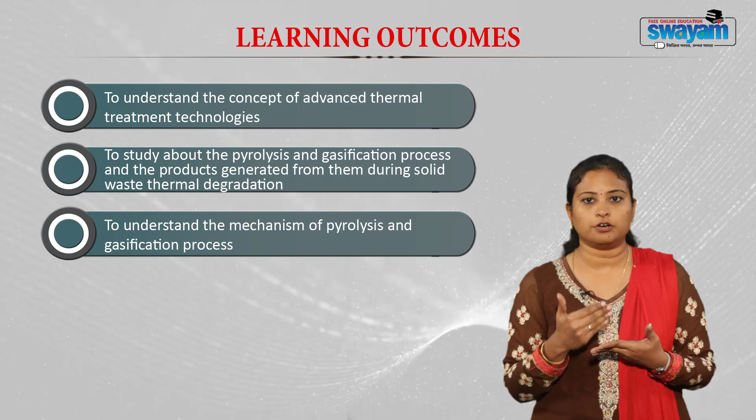The learning objectives include: first, understanding the concept of advanced thermal treatment technologies. Then we will study in detail about pyrolysis and gasification processes, look into the various products generated from them during solid waste thermal degradation, and understand the various mechanisms of pyrolysis and gasification.

We will also study the different types of pyrolysis and gasification processes available and the various reactors used to perform them. Finally, we will understand the different merits and demerits of the pyrolysis and gasification processes.

Advanced thermal treatment technologies are waste treatment technologies that use very high temperature to degrade or destruct the waste. They are specifically designed to recover energy in the form of heat or electricity, and other end products usable as chemical feedstock. The main purpose is to reduce the impact of residual waste on the environment. Pyrolysis and gasification are examples of these advanced thermal treatment technologies.

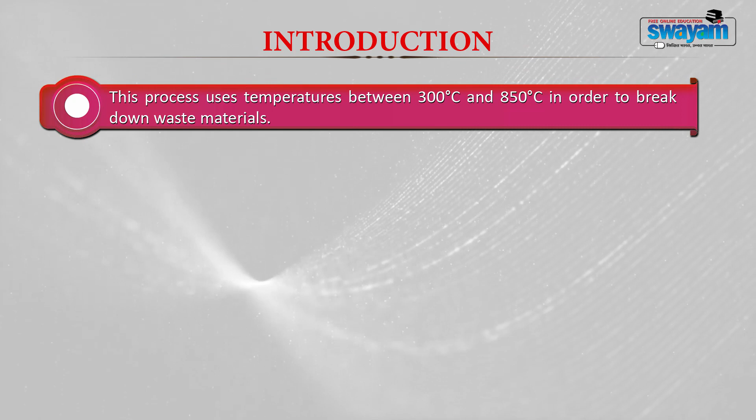Pyrolysis is a process where waste is thermally destructed in the absence of oxygen at a temperature of 300 to 850 degrees Celsius. Gasification is done in the limited supply of oxygen at a temperature of 900 to 1400 degrees Celsius. Pyrolysis results in the production of three compounds: solid, liquid and gases—solid char, liquid oil, and gases like carbon monoxide, hydrogen and carbon dioxide.

Likewise, the process of gasification results in the production of syngas, which is carbon monoxide and hydrogen, along with tar and other fertilizer value products.

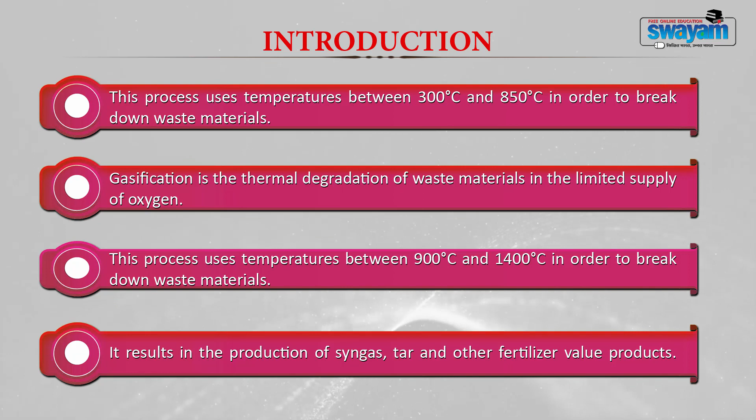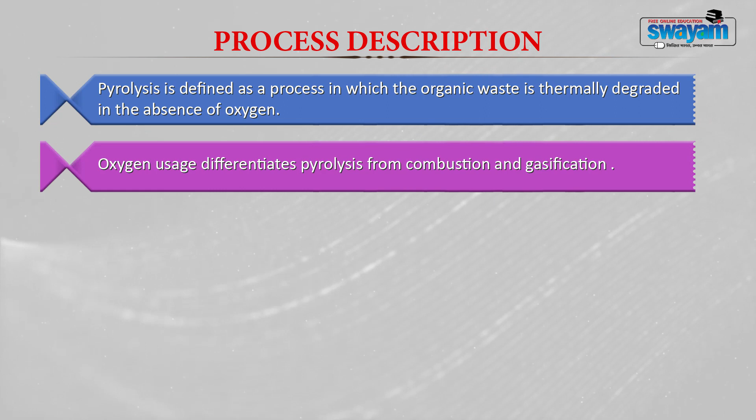Now let us discuss pyrolysis in detail. In pyrolysis, organic waste is thermally destructed in the absence of oxygen. Oxygen is the key factor that differentiates pyrolysis from other processes like combustion and gasification. Combustion is done in the presence of oxygen, gasification in limited supply of oxygen, and pyrolysis in the absence of oxygen.

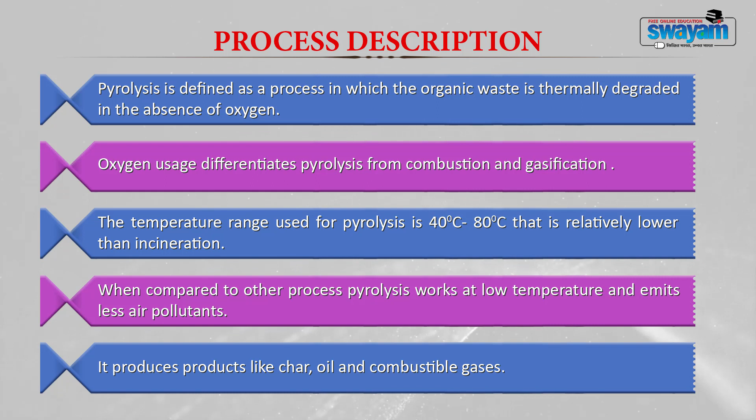The temperature range varies from 400 to 800 degrees Celsius, comparatively lower than incineration. Since pyrolysis is operated under low temperature, this results in emission of less air pollutants. It also produces products like char, a solid product, oil, a liquid product, and certain combustible gases.

Pyrolysis is a flexible process with the ability to produce solid, liquid and gaseous products, and the quantity of each depends upon the temperature and heating rate. It transforms low energy density waste into biofuels of high energy density and high value chemicals. The end products obtained at the end of the pyrolysis process are explored for fuel applications, as chemical feedstock, and for other energy extraction processes.

The mechanism involved is very simple. Complex materials like paper, plastic, metal, glass, cardboard, leaf litter, and other biodegradable and hazardous chemicals are heated at very high temperature. At this temperature, complex polymeric organic molecules like cellulose, hemicellulose and lignin break down and get converted into short chain molecules. Further exposure to heat breaks these short chain molecules into oils and other gases.

Now, let us discuss about what are the different products that are produced during pyrolysis, at what conditions they are produced, where they are used, and what are their applications and significance.

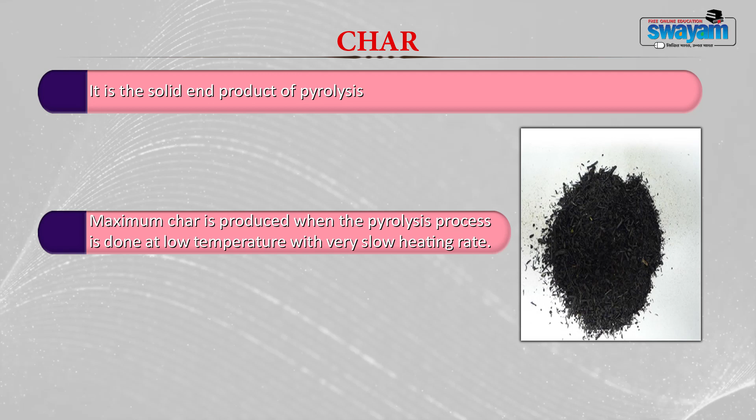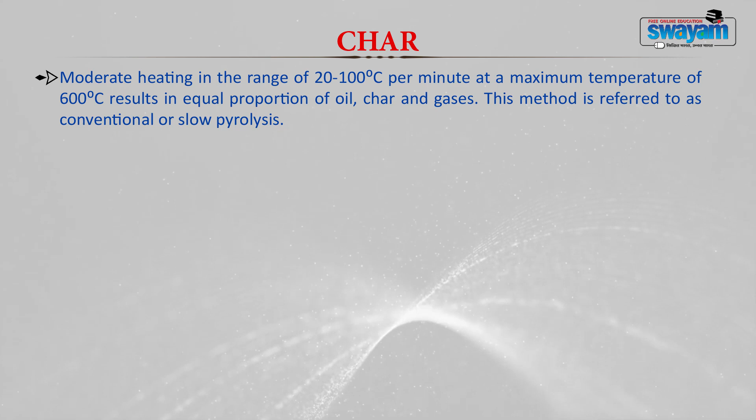Char is a solid end product of pyrolysis. Char production can be maximized at low temperature and a slow heating rate, and it depends upon the pyrolysis process condition. Moderate heating in the range of 20 to 100 degrees Celsius per minute at a maximum temperature of 600 degrees Celsius results in an equal proportion of oil, char and gas. This method is generally referred to as conventional or slow pyrolysis.

The solid char produced from slow pyrolysis can be used as charcoal. The char formation is generally reduced in the flash pyrolysis process.

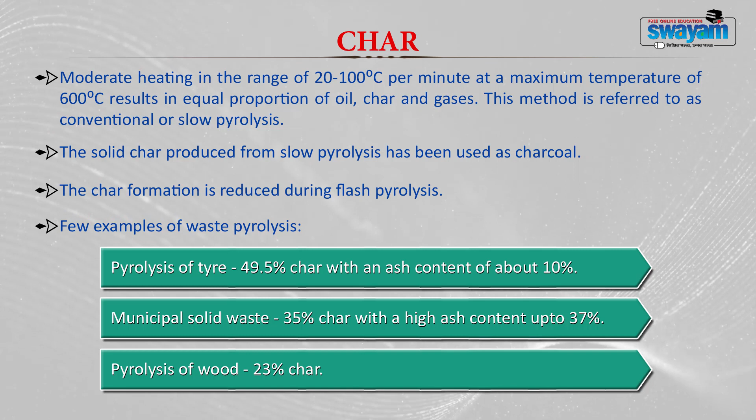Examples of char production during pyrolysis: the pyrolysis of tire results in 49.5% char production with an ash content of 10%. Municipal solid waste produces 35% char with a high ash content of up to 37%. Likewise, the pyrolysis of wood results in 23% char production.

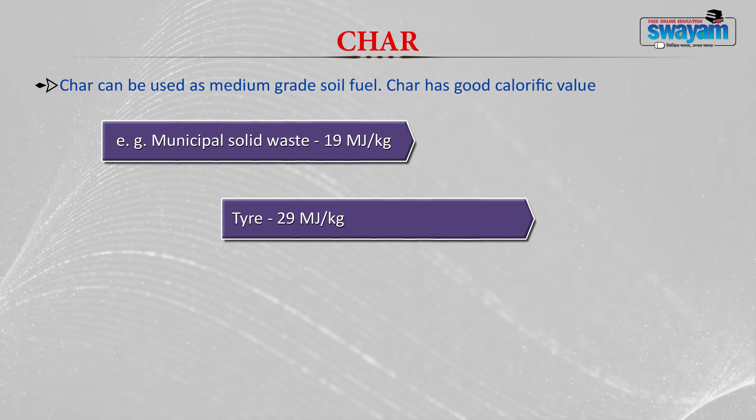Char can be used as a medium grade solid fuel, as it has a good calorific value. For example, char generated from municipal solid waste contains around 19 megajoules per kg calorific value. Tire char contains a calorific value of 29 megajoules per kg, and wood contains 33 megajoules per kg. Generally, the value of char in fuel production is minimized due to the ash content present in the product at the end of pyrolysis.

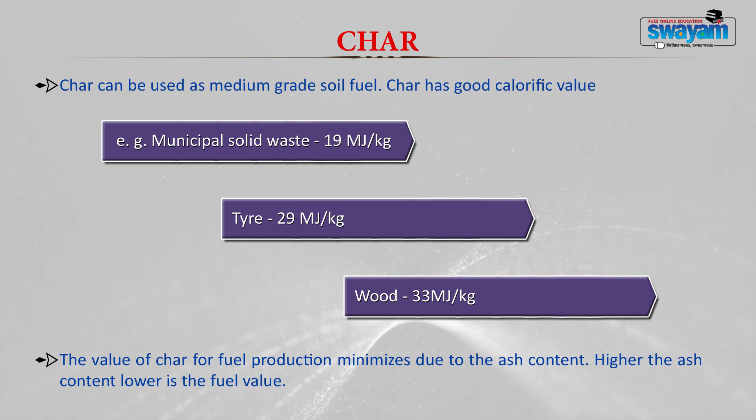Higher the ash content, lower will be the fuel value. So generally what you have to do is de-ashing before using it for fuel purposes.

The next product produced during the pyrolysis process is oil. The oil generated from the pyrolysis process contains a high energy density per unit weight. It can be used as a fuel with certain modification. Generally what they do is combine or mix it with petroleum refinery stock and upgrade the quality using certain catalysts. The calorific value of oil generated from municipal solid waste ranges from 25 to 40 megajoules per kg.

The composition of oil is very complex and contains a wide variety of chemicals ranging from organic acids, phenols, alcohols, aldehydes, ketones, furans, etc.

Maximum amount of oil production can be obtained by flash pyrolysis. If you talk about char, slow pyrolysis results in maximum char production and flash pyrolysis results in reduced char production. So here, maximum oil production can be obtained by the flash pyrolysis process.

Now, depending upon the feedstock used in the pyrolysis process, the oil produced can be categorized as true oil, oil aqueous phase, separated oil, and aqueous phase.

Now let us see the applications of this oil. The oil derived from the pyrolysis of municipal solid waste cannot be used directly as a fuel because of the presence of solid char particles, viscosity and acidity. So you have to refine it before use.

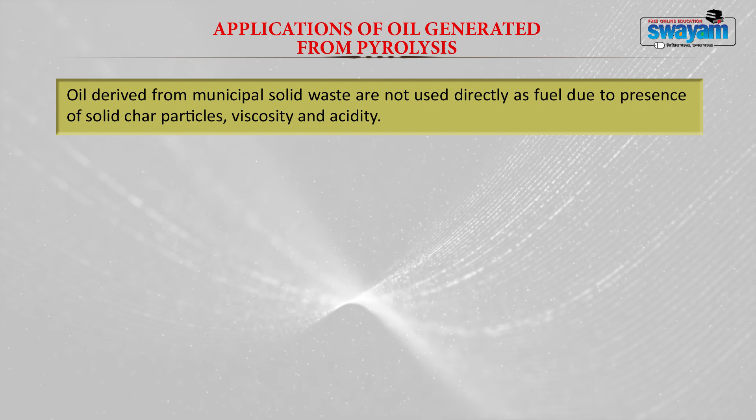So the pyrolysis oil is generally used as a chemical feedstock, meaning it acts like a raw material for the production of other products. Compounds like methylphenol, methoxyphenol, furfural, and methoxypropenyl phenol are produced during wood pyrolysis. They can be used in the food, paint and pharmaceutical industries.

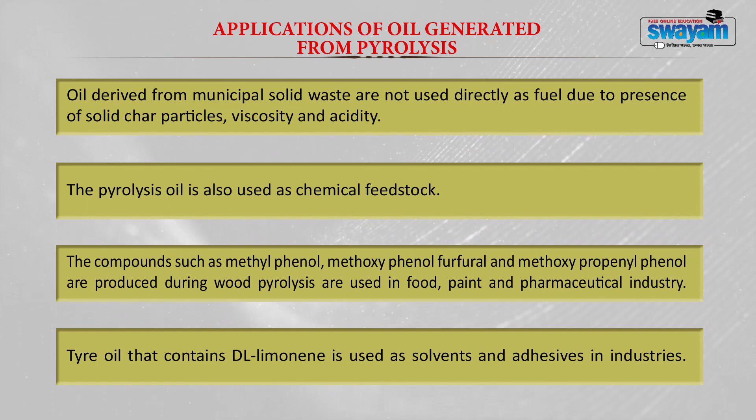Likewise, the oil generated during tire pyrolysis contains DL-limonene. It can be used as a solvent and adhesive in certain industries. They also replace chlorofluorocarbons and can be used as a cleaning agent for electronic circuit boards.

Benzene, toluene, xylene and styrene that are produced can be used in the chemical and pharmaceutical industry. Likewise, the waxy oil generated during mixed pyrolysis can be used in catalytic cracking to produce gasoline.

The third product produced during the pyrolysis process is gases. The gas generated during pyrolysis is composed of hydrogen, carbon monoxide, carbon dioxide, methane, and certain hydrocarbon gases. High levels of carbon dioxide and carbon monoxide are due to the presence of cellulose, hemicellulose and lignin in the waste material.

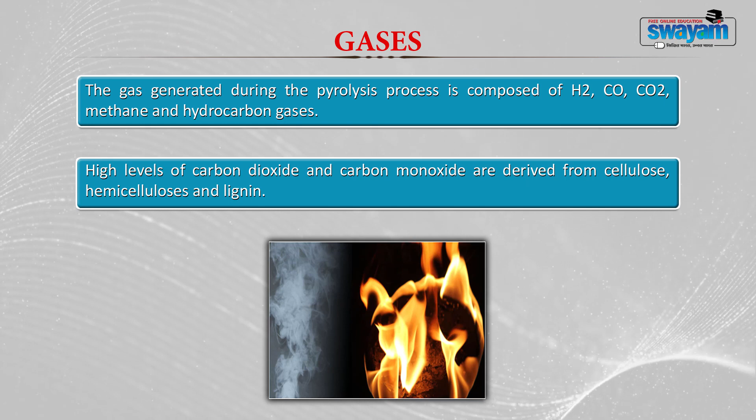High levels of hydrogen, methane and other hydrocarbon gases are formed during the pyrolysis of tire and mixed plastics. These gases generally have medium to high calorific value.

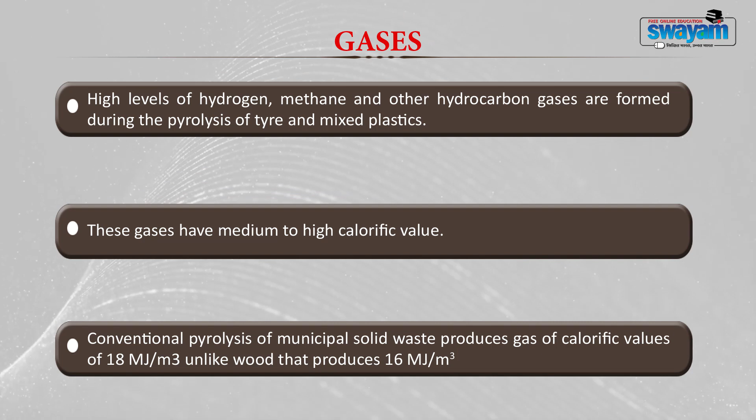Conventional pyrolysis of municipal solid waste produces gas with a calorific value of 18 megajoules per cubic meter, unlike wood, which produces 16 megajoules per cubic meter of gas.

High heating rate and temperature break down the pyrolysis oil into gas. So a maximum calorific value of 40 megajoules per cubic meter is observed in gas produced during tire pyrolysis.

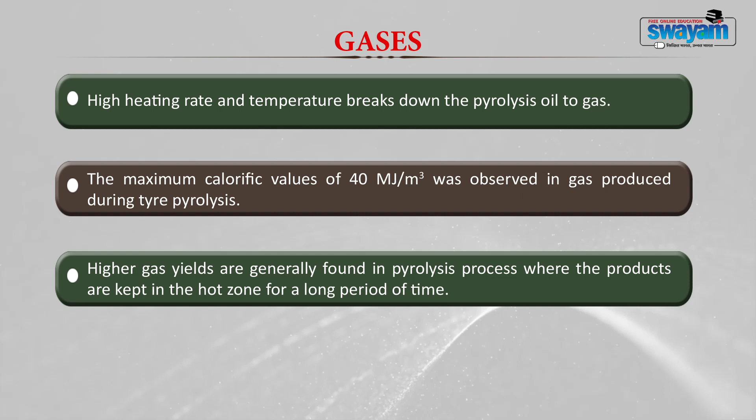Higher gas yields are generally found in pyrolysis processes where the products are kept or exposed to a hot zone for a long period of time. The gas yield is higher even at temperatures above 750 degrees Celsius.

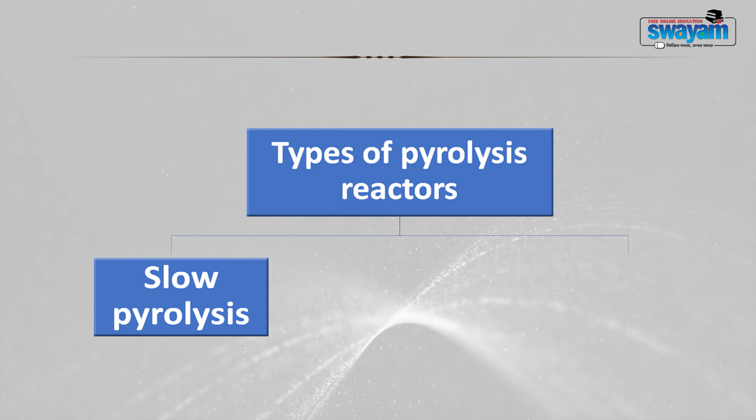Now let us discuss the various types of pyrolysis process. As I told you earlier, you have slow pyrolysis, flash pyrolysis, and vacuum pyrolysis. The first one is slow pyrolysis.

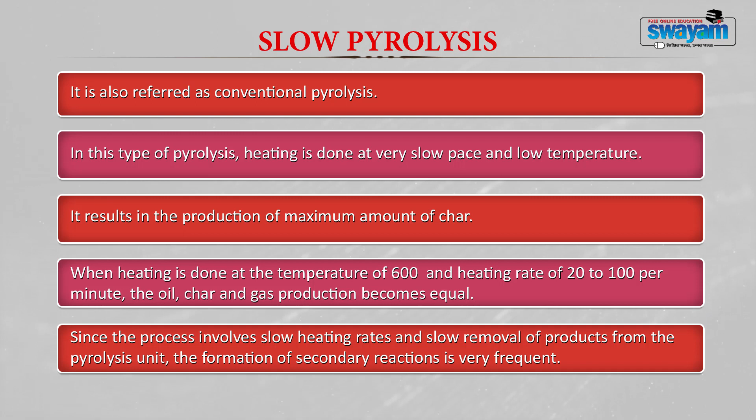Slow pyrolysis is also referred to as conventional pyrolysis process. In this type, heating is done at a very slow pace and low temperature, and it results in the production of maximum amount of char. When heating is done at a temperature of 600 degrees Celsius and a heating rate of 20 to 100 degrees Celsius per minute, the oil, char and gas production becomes equal. This I have already told you earlier. So under a slow pyrolysis process, you can achieve equal amounts of oil, char and gas. Since it involves a very slow heating rate and slow removal of products from the pyrolysis unit, the formation of secondary reactions is more frequent.

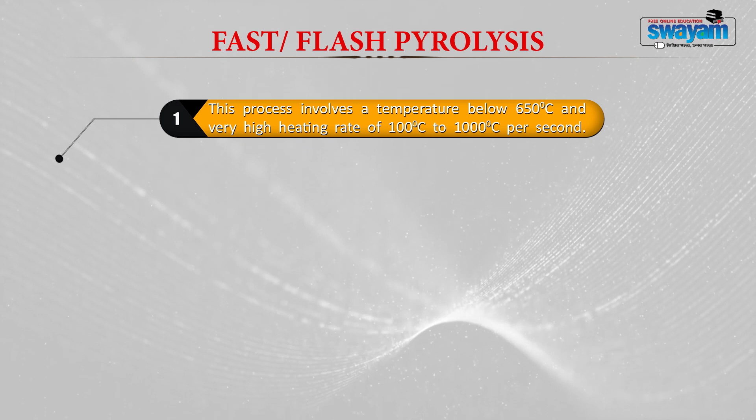The next type of pyrolysis process is fast or flash pyrolysis. Here, it involves a temperature below 650 degrees Celsius, but a very high heating rate of about 100 to 1000 degrees Celsius per second. The process results in a maximum liquid yield of 70% with a minimum amount of char and gas. Gas production is minimized due to rapid quenching of the liquid generated during the process. Also, the high reaction rate minimizes char formation. Wood and tire are examples of waste that can be pyrolyzed through the flash pyrolysis process.

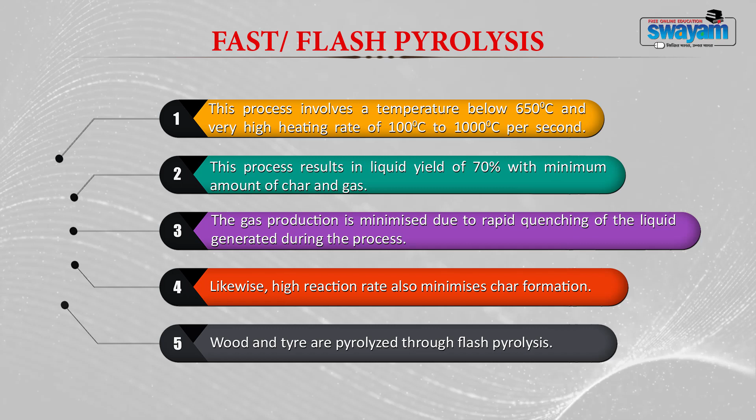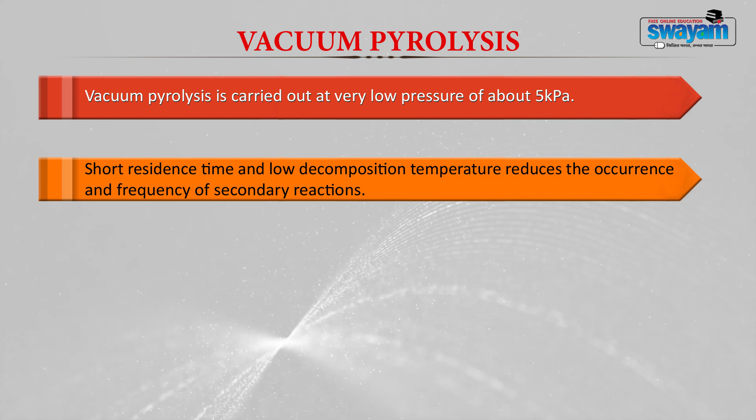The next type is vacuum pyrolysis. Vacuum pyrolysis is generally conducted at a low pressure of about 5 kilopascals. Short residence time and low decomposition temperature generally avoid or reduce the frequency of secondary reaction formation. Vacuum pyrolysis can be done for different types of waste like household waste, wood, plastic, tire, circuit boards and so on. This type of pyrolysis, however, is not common among the other types.

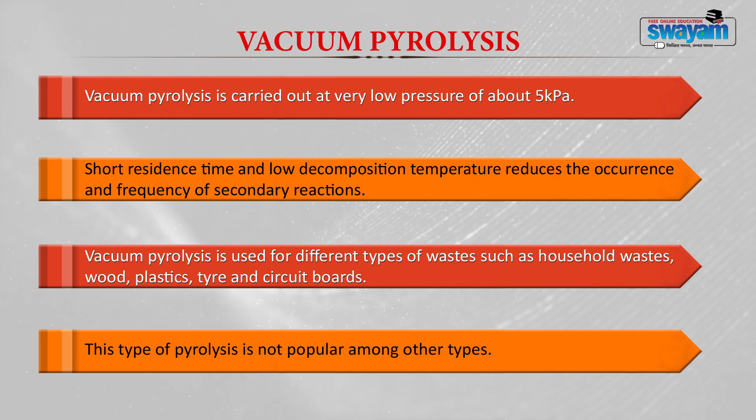Now let us discuss the different types of pyrolysis reactors. The first type is a fixed bed reactor, one of the simplest reactors. The design is very simple and you can construct it very easily. The reactor is generally made up of stainless steel, heated externally through an electric furnace, and inside you flush in nitrogen or argon gas to maintain inert conditions, because pyrolysis works under absence of oxygen. The waste is placed at the bottom and then subjected to heat.

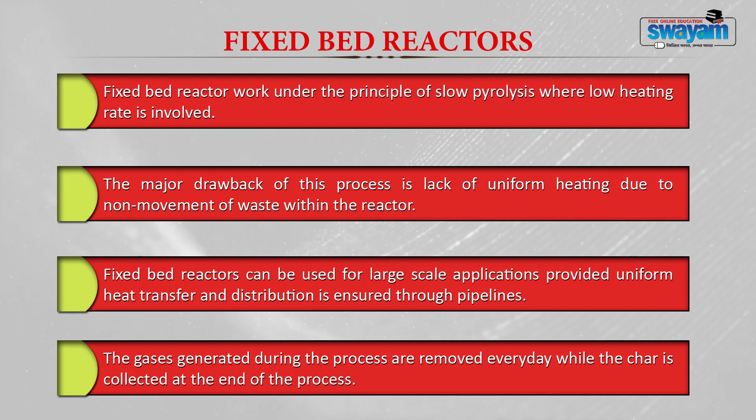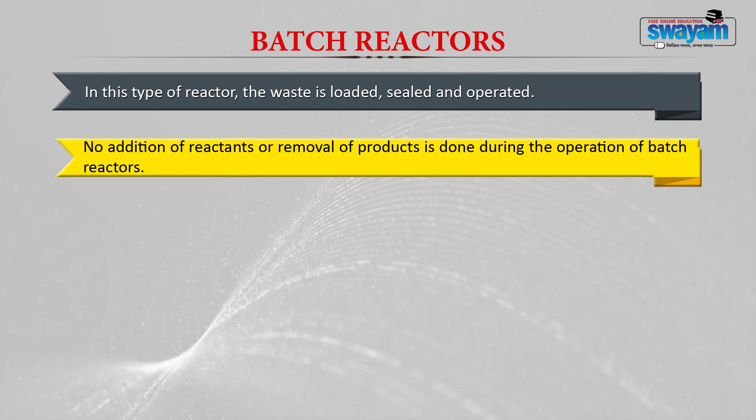The second type of reactor is the batch reactor. In this type, waste is loaded into the unit, sealed and operated. You neither add any reactant nor remove any product during operation of batch reactors. Here, high conversion rate is observed because the reactor is closed and sealed. However, in semi-batch reactors, addition of reactants and removal of products is generally allowed. The end pyrolysis product is not uniform for every batch. For example, if you operate the unit in the first batch, you receive certain products, but the quantity or composition of products will not be the same for the next batch operated in the batch reactor. That becomes a major disadvantage.

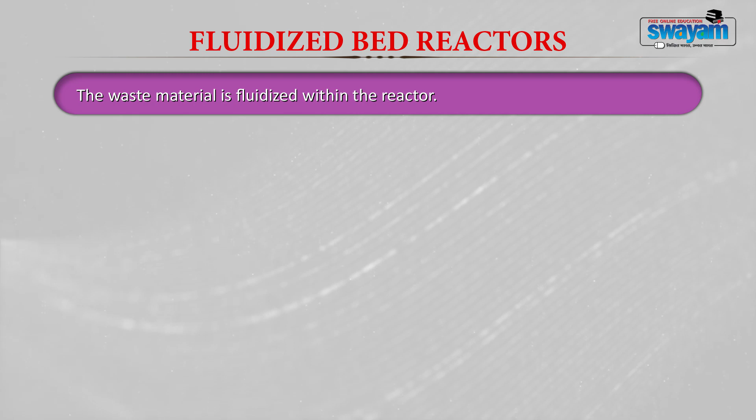The third type of reactor is the fluidized bed reactor. Here, the waste material is fluidized within the reactor, meaning it is just bubbled. The waste material keeps moving up and down, bubbling inside the reactor. Fluidization generally results in good mixing and proper distribution of heat within the waste mixture. The characteristic features of the fluidized bed reactor are high heating rate, it retains heat for a long period of time, and it distributes heat uniformly throughout the unit.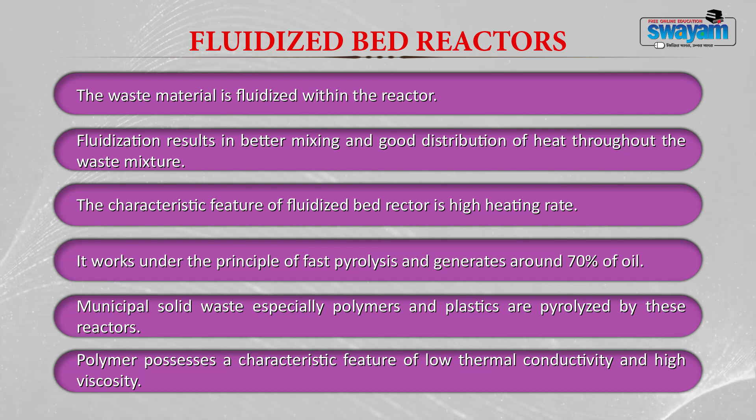It works under the principle of fast pyrolysis, resulting in the generation of maximum amount of oil, around 70%. Municipal solid waste, especially polymers and plastics, are pyrolyzed in fluidized bed reactors. Polymers generally possess low thermal conductivity and high viscosity as their characteristic, so the fluidized bed reactor will be optimum for those. High heating efficiency and high heat distribution in fluidized bed reactors generally facilitate the cracking of these polymers.

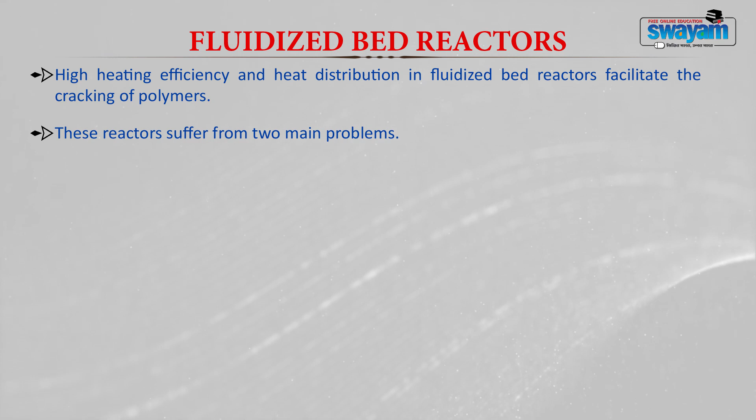These reactors generally suffer from two main problems. One, the char separation from the reactor is very difficult, and better fluidization is achieved only if the particle size is smaller. So the waste requires certain pre-treatment before being subjected to a fluidized bed reactor.

What you have to do is, after collection, the material should be sorted, dried, crushed or shredded into small pieces and then loaded into the reactor for the pyrolysis process. Plastics and paper can be shredded or cut into a size of 5 mm, and biomass can be reduced to a size of 1 centimeter.

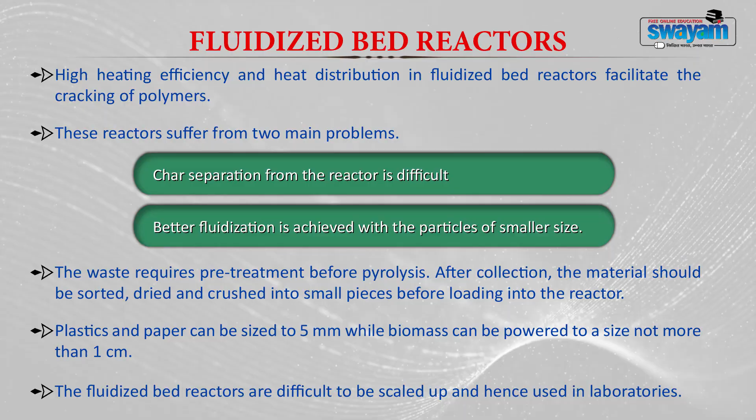Now, the fluidized bed reactors are very difficult to scale up, and hence they have limited application only in the laboratories. Now let us look into the advantages of the pyrolysis process.

Pyrolysis process is used for degrading biodegradable waste and plastics using high temperature. Here you can recover energy in the form of heat or electricity. When compared to mass burning, energy and other value added products are recovered by advanced thermal treatment processes like pyrolysis.

The high temperature involved in pyrolysis generally will kill all the pathogens and harmful organisms present in the solid waste. Also, it will reduce the water content of your final product.

The gas that is produced during the thermal degradation process can be used as a fuel. If you use them as a fuel, it will minimize the load on the use of external fuel, if the producer fuel is used for pyrolysis.

Then the biochar, the char that is produced during the pyrolysis process, can be used as a soil amendment or as activated carbon. Biochar is reported to sequester carbon and increase the fertility of soil. This again becomes an added advantage of the pyrolysis process.

The bio oil that is produced can be combusted either directly in boilers and engines. Also, this process degrades even complex pollutants into simpler ones.

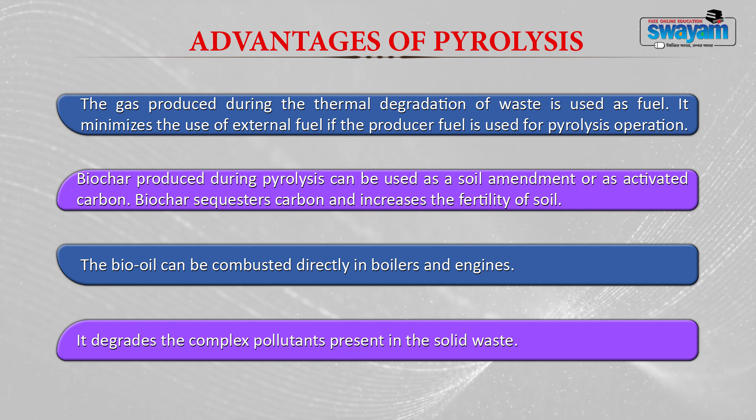Then it favors recycling of mixed plastics and soiled plastics which cannot be taken for the recycling process. This you can achieve in the pyrolysis process. Which means only plastics which have certain strength or thickness can be recycled. So other plastics like poly bags or soiled plastics used in agricultural mulch, silage or greenhouse films can be recovered or destroyed in the pyrolysis unit.

Now, the pyrolysis unit again minimizes the volume of waste, and the amount of residual waste sent to the landfill is very less. The pyrolysis plants are very flexible because they are modular in nature, and you can fix them at any point and perform the process.

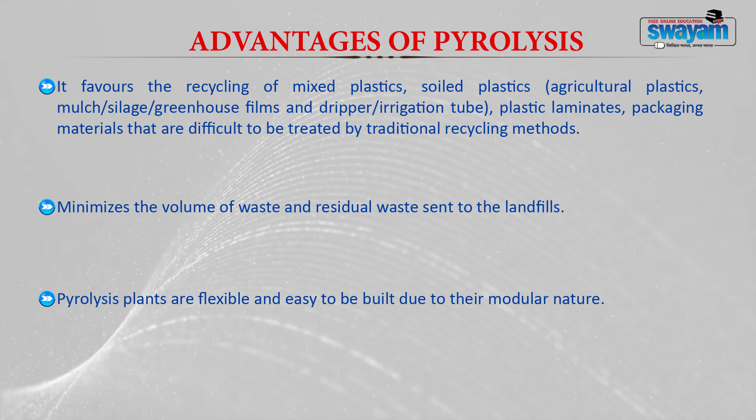Even you can fix it at the source of generation, or in the transfer station, or even at the disposal site. The number of pyrolysis units can also be added or reduced according to the requirement of a society or community. Also, these units are very easy to build. Moreover, since pyrolysis units work under very low temperature, the air pollution emission levels are very less, unlike your incineration process.

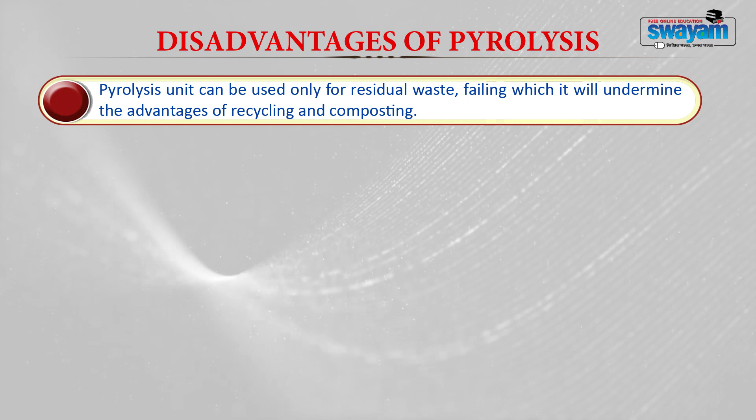Now let us discuss the disadvantages of the pyrolysis process. Pyrolysis can be used only for residual waste, failing which it will undermine the advantages of recycling and composting. Second, feedstock of pyrolysis generally needs pre-treatment or pre-processing before being subjected to the pyrolysis process.

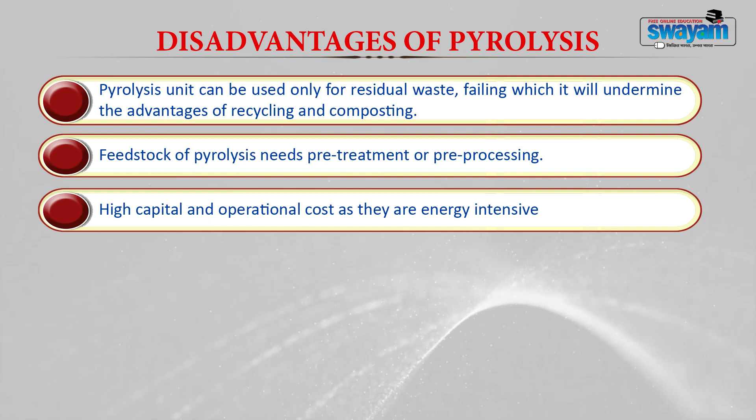High capital and operational cost. Pyrolysis process involves high capital and operation cost because it is very energy intensive, as it involves very high temperature. It also requires skilled operators for operating the unit. Also, though it emits less air pollution, control devices need to be installed in the pyrolysis unit. The ash generated during the thermal degradation may contain certain heavy metals and would require safe disposal.

With this, let us look into the process description of the gasification process. Gasification is a process by which solid or liquid waste material is converted, by the action of heat, into a gaseous material, ash and tar, in a limited supply of oxygen. It is a unique process in which the carbon present in the municipal solid waste is converted into energy without burning it.

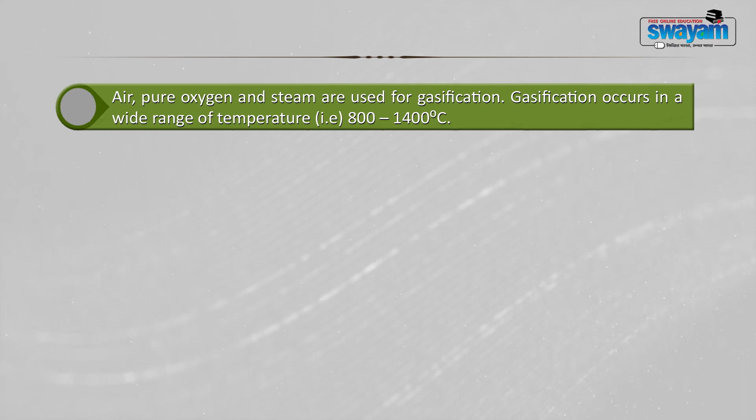The gases generated during the process are carbon monoxide and hydrogen, generally termed as syngas. Other gases like carbon dioxide and methane are also produced. Gasification is done at a temperature of 800 to 1400 degrees Celsius, and air, pure oxygen, and steam can be used as agents for performing the gasification process.

According to the supplementing agent used for burning the waste, the calorific value of the gas also keeps changing, from a low calorific value of 4 megajoules per meter cube to 20 megajoules per meter cube. That is, when air is used, the calorific value is low, and when steam is used, the calorific value is as high as 20 megajoules per meter cube.

The calorific value of the gases produced during the gasification process is comparatively low when compared with natural gas, which has a calorific value of 37 megajoules per meter cube.

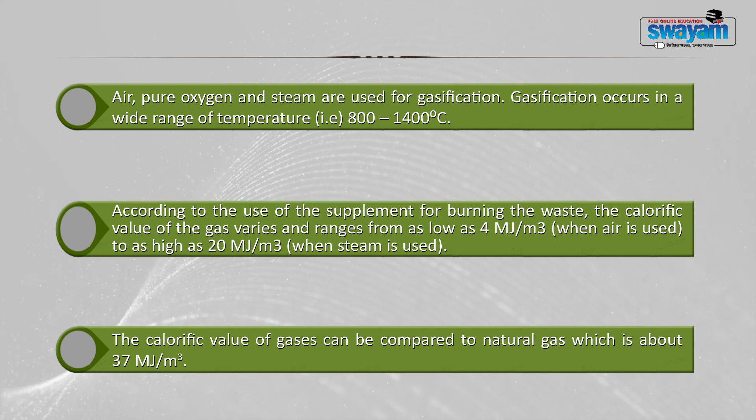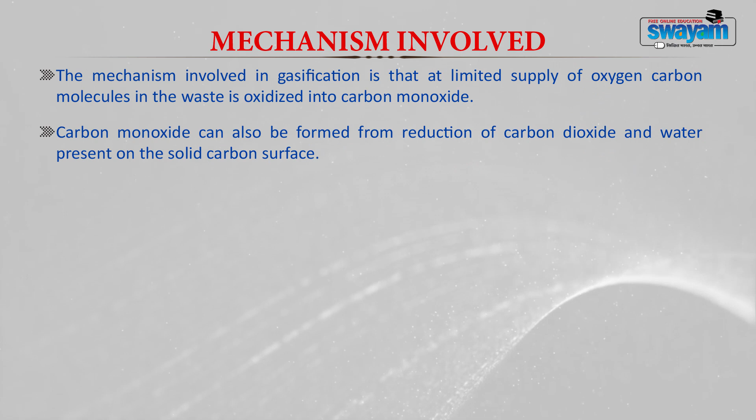Now let us discuss the mechanism involved in the gasification process. During limited supply of oxygen, carbon molecules present in the waste are oxidized into carbon monoxide. Carbon monoxide can also be formed by the reduction of carbon dioxide and water present on the solid carbon surface.

Gasification is always preceded by pyrolysis, and hence char-like organic material can be used as feed for the gasification process. What I mean is, pyrolysis can be done first, and the char produced in the pyrolysis process can be further subjected to gasification to result in the production of syngas.

Gases generally interact with the solid char interface to extract carbon from the surface into gases such as methane, carbon monoxide and carbon dioxide. Gaseous water can interact with the char surface to be reduced into gaseous hydrogen.

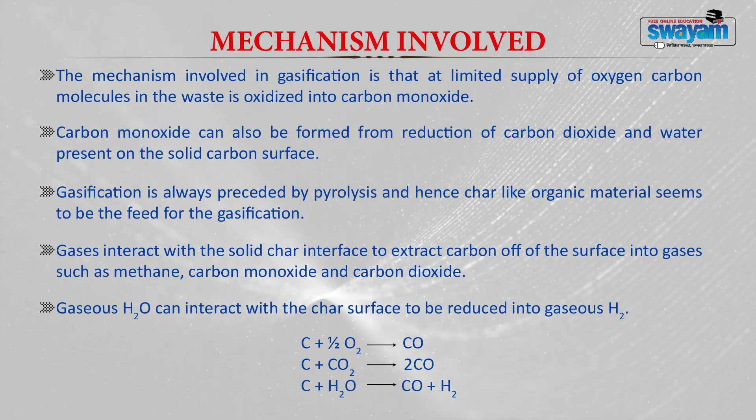Carbon combines with half a molecule of oxygen to provide carbon monoxide, and carbon monoxide can also be formed from carbon dioxide. Carbon combines with carbon dioxide to form two molecules of carbon monoxide. Then the water vapor can combine with carbon to produce carbon monoxide and H2 gas.

When put together, these gases are called syngas. Now let us discuss the different types of gasification process. Depending upon the agent used for performing gasification, like air, oxygen, steam or hydrogen, they are classified into different types: air gasification, oxygen gasification, steam gasification, gasification with hydrogen, thermal depolymerization, and plasma gasification.

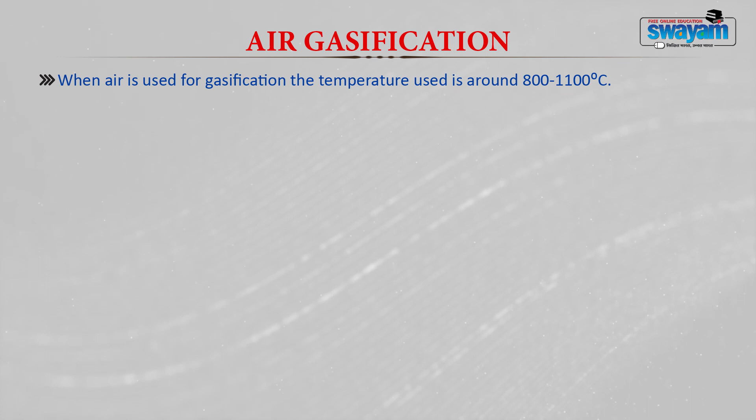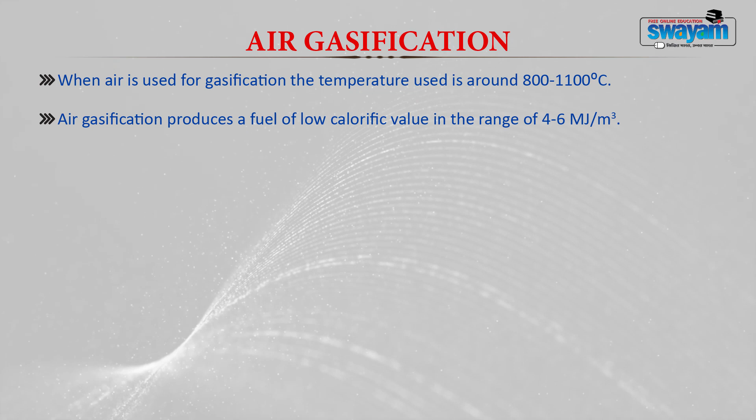Air gasification is a process where air is used for gasifying the waste material, and the temperature requirement is 800 to 1100 degrees Celsius. This generally produces a gas or fuel of low calorific value, in the range of 4 to 6 megajoules per meter cube. The moisture present in the air produces hydrogen. In addition to other gases, nitrogen also occurs as a major component, along with carbon monoxide, carbon dioxide and methane. Nitrogen generally reduces the calorific value of the gas.

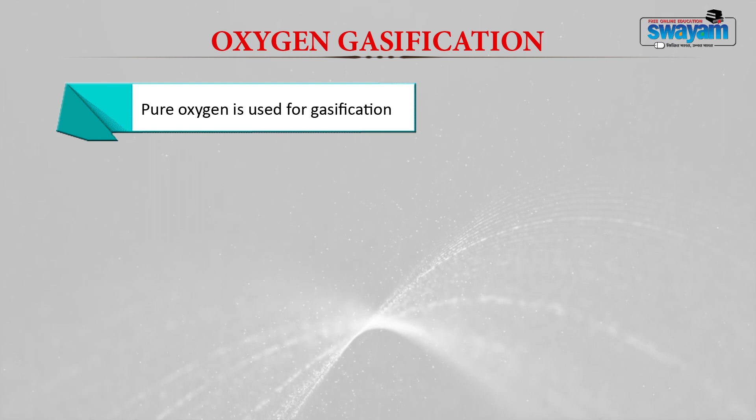The next type of gasification process is oxygen gasification. Here pure oxygen is used for gasifying the solid waste. The temperature is relatively high in this process, around 1000 to 1400 degrees Celsius. The calorific value of the fuel produced is medium, around 10 to 15 megajoules per meter cube. Steam gasification is usually used as a supplement to oxygen to control the temperature.

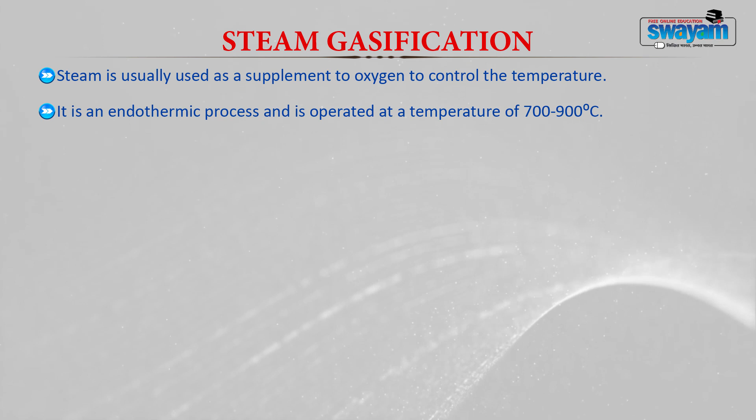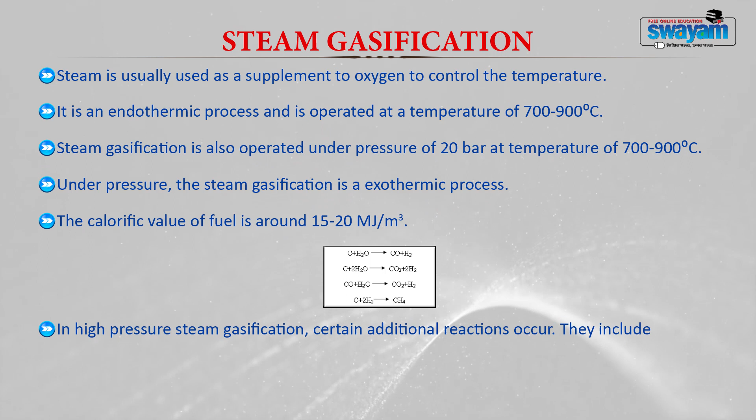Steam gasification is generally an endothermic process, operated at a temperature of 700 to 900 degrees Celsius. It is again operated at a pressure of 20 bar and the same temperature range. Under this pressure, steam gasification becomes an exothermic process. The calorific value of fuel produced during steam gasification is around 15 to 20 megajoules per meter cube. However, under high pressure, certain additional reactions also occur.

The equations provided here depict the steam gasification process. Carbon combines with water to form carbon monoxide and hydrogen. It also produces carbon dioxide and hydrogen. Likewise, carbon monoxide combines with water to form carbon dioxide and hydrogen. Carbon also combines with hydrogen to form methane.

Under high pressure conditions, certain additional reactions also occur, like carbon monoxide combining with hydrogen to form methane and water, and carbon dioxide combining with hydrogen to form methane and water. So methane is another additional product produced during the steam gasification process.

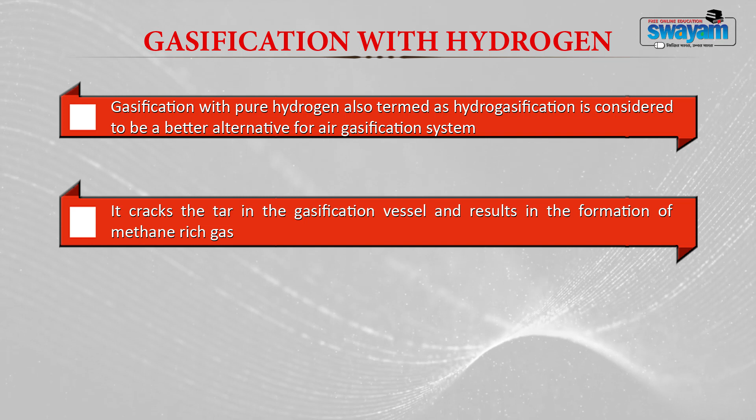The next type of gasification is gasification with hydrogen. Here pure hydrogen is used for gasifying the waste material, and it is also called hydrogasification. It is considered a better alternative than air gasification systems. It can crack tar in the gasification vessel and result in the formation of methane-rich gas. Methane can later be converted into hydrogen or methanol according to requirement.

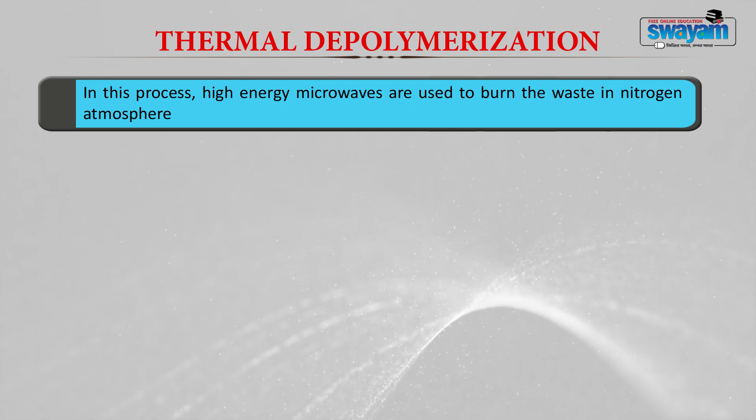The next type is thermal depolymerization, which involves a very high energy microwave to burn the waste under a nitrogen or inert atmosphere. The waste absorbs the microwave and increases the internal temperature and energy of the organic material. This results in thermal decomposition of the waste. Again, as mentioned earlier, nitrogen inhibits or reduces the calorific value of the fuel. Thermal depolymerization can also be done at a temperature of 150 to 350 degrees Celsius.

The last type of gasification process is plasma gasification, which is carried out at a very high temperature of 5500 degrees Celsius. Plasma is nothing but an ionized gas formed when an electric discharge is passed through a gas.

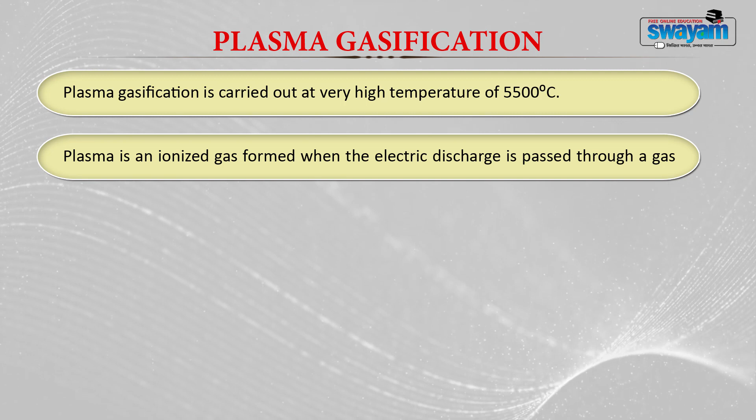In plasma, the electrical energy is converted into intense heat, that is thermal energy, and at that temperature plasma destroys even the hazardous waste. The ash that is generated in incinerators is destroyed or converted into non-leachable slag in the plasma gasification process. Plasma gasifiers follow the same mechanism as that of other gasifiers. However, here the rate of reaction is very fast because the temperature that is supplied is very high.

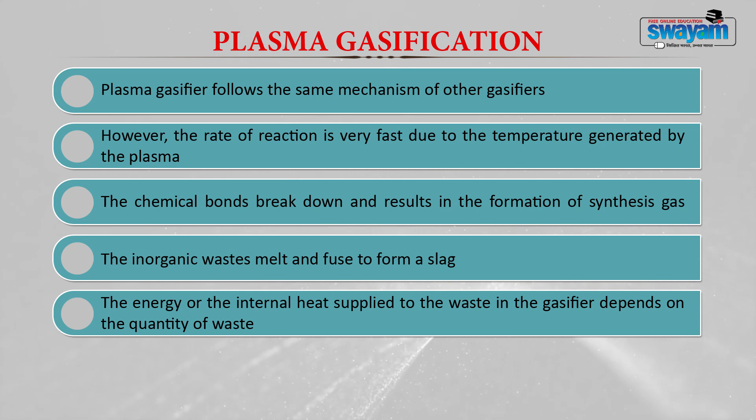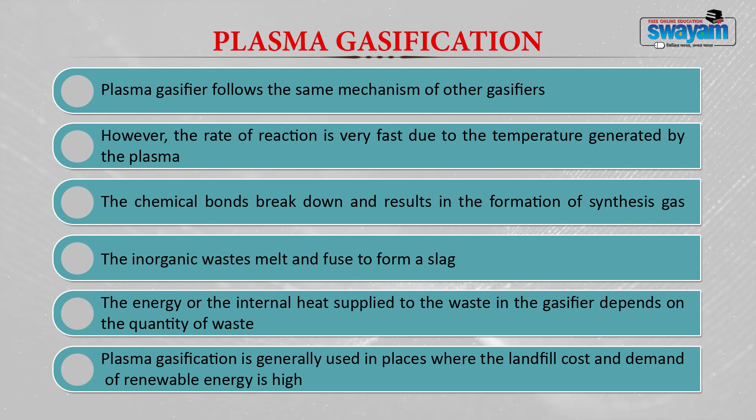The chemical bonds break and result in the formation of synthesis gas, and the inorganic waste generally melts and fuses to form a slag. The energy or the internal heat that is supplied to the waste in the gasifier will depend upon the quantity of waste that you are subjecting to the gasification process. Plasma gasification is used in places where the landfill cost is very high and the demand for renewable energy is high.

Now, let us discuss the different types of gasifiers. How do you select a gasifier for burning or destroying your waste? Gasifiers are selected on the basis of the available fuel quality, capacity and gas quality conditions. Based on that, gasifiers are classified into two types: one is the fixed bed gasifier and the other one is the fluidized bed gasifier. Usually, municipal solid waste is gasified in large capacity gasifiers. Variable fuel feed, uniform process temperature, high turbulence, good interaction between the gases and solid and high carbon conversion make the larger gasifier more advantageous than the smaller ones.

Now, we will discuss the fixed bed gasifiers and the different types of fixed bed gasifiers. Fixed bed gasifiers are a simple and easy technology to operate. They are commonly used in small and medium scale power generation units. These gasifiers are provided with a grate to support the feed material and maintain a stationary reaction zone. Fixed bed gasifiers are of two types: one is updraft and the other one is downdraft gasifiers.

Updraft gasifiers are also called the counter current gasification process. In this reactor, the fuel or the waste is added from the top and the gasifying agent like air, steam or oxygen, hydrogen, is injected from the bottom. That is why it is called counter current, because the feed comes in and the air or the gasifying agent comes in the opposite direction. The syngas that is produced during the process leaves the reactor from the upper end of the gasifier.

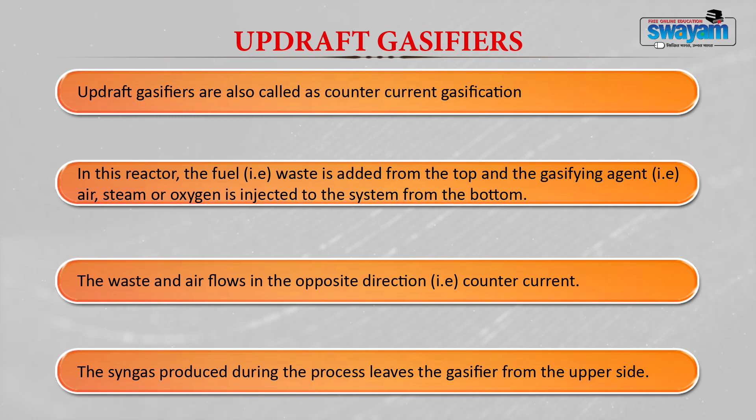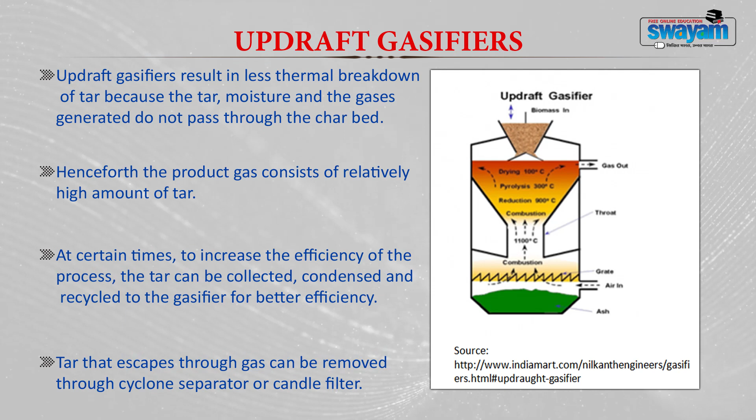Within the gasifier you can see a clear zonation, and the combustion occurs especially in the bottom zone of the gasifier, above which you find a zone where reduction reactions generally occur. This image shows an updraft gasifier. You can see clear zonation within this gasifying unit.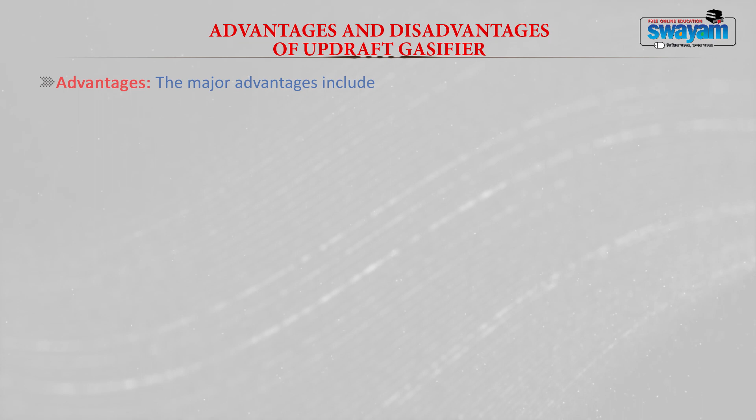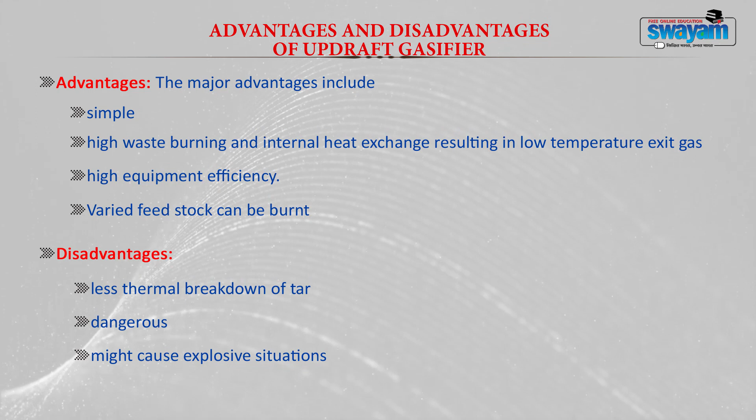Now, let us look into the advantages and disadvantages of an updraft gasifier. The major advantages are they are very simple to operate. High waste burning and internal heat exchange generally result in low temperature exit gas. The updraft gasifier has high equipment efficiency. Varied types of feedstock can be burnt in an updraft gasifier. The disadvantages are that the thermal breakdown of tar is very low. They produce certain dangerous products. They might cause explosive situations. Also, they require an automatic moving grate.

Now, the downdraft gasifier is also termed a co-current gasifier because the waste and the gasifying agent move in the same direction. This is generally designed to overcome the drawbacks of the updraft gasifier. The updraft gasifier faces the problem of tar entrainment in the product gas. The product gas that is produced contains a lot of tar material, which needs to be purified. So, to avoid this disadvantage of the updraft gasifier, downdraft gasifiers were developed.

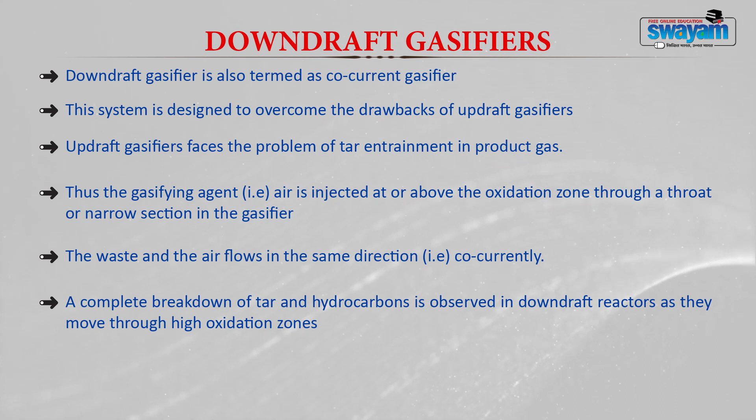The gasifying agent like air is injected at or above the oxidation zone through a small slit or throat which is inserted in the gasifier. The waste and the air flow in the same direction, as I told you earlier, co-currently. Here the complete breakdown of tar and hydrocarbons is observed in a downdraft reactor because they move through high oxidation zones. Also, increased levels of hydrogen and light hydrocarbons are observed in these gasifiers.

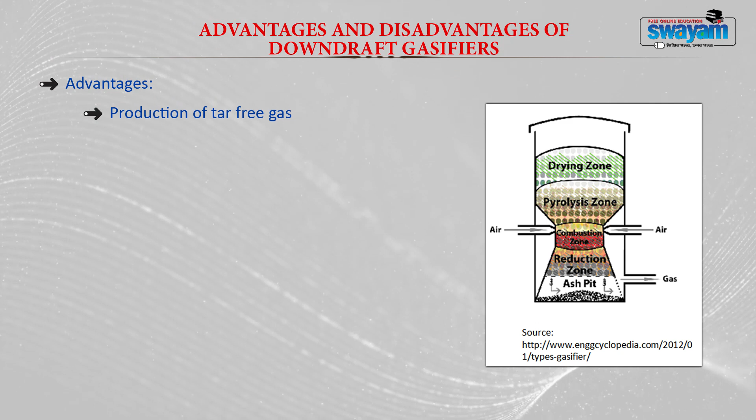The advantages of downdraft gasifiers are, one, production of tar free gas, and two, high conversion of pyrolysis intermediates. The disadvantages are it cannot be operated for different types of feedstocks and they are not ideal for waste treatment because they require low ash fuel. The problems of flow and pressure drop are very frequent in downdraft reactors. Also, they show lower efficiency and the product gas that is produced is of low calorific value.

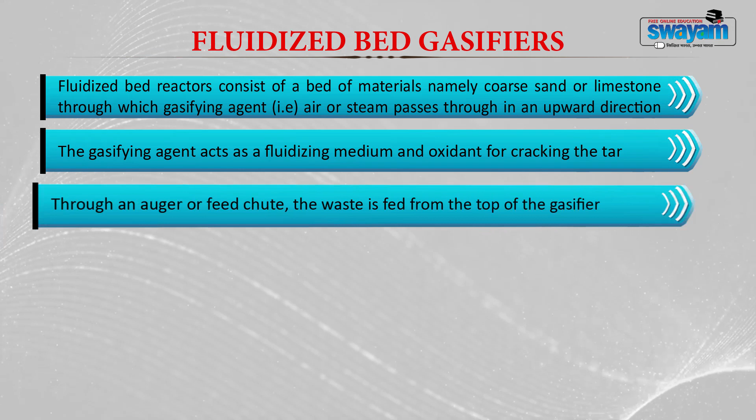The next type of gasifier is a fluidized bed gasifier, which consists of a bed of coarse sand or limestone. Through this, the gasifying agent is passed in an upward direction. The gasifying agent acts like a fluidizing medium and an oxidant for cracking the tar. Through an auger or a feed chute, the waste is generally fed at the top of the gasifier.

Now, good mixing, efficient reaction, high heat transfer, good operational control and compactness of the chamber are some of the advantages of fluidized bed reactors. The fluidized bed gasifiers are generally used in places where the fuel generation capacity is 10 megawatt. Now, you can also have twin fluidized bed reactors for gasification process where the first reactor can be used to gasify the waste and the other can be used for combustion of char.

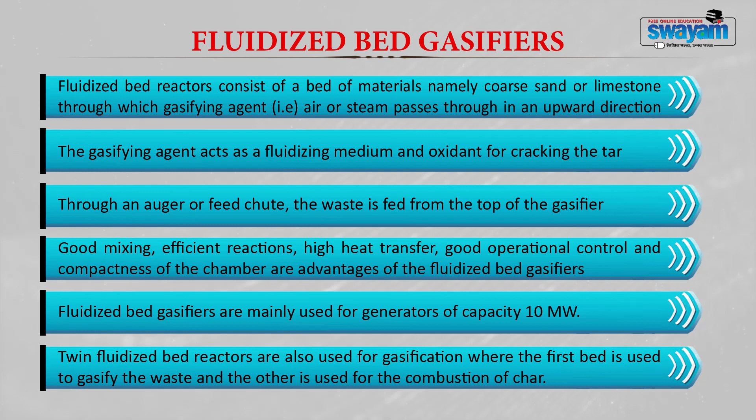Again, fluidized bed gasifiers are classified into two types, one bubbling fluidized bed reactor and the other one is circulating fluidized bed reactor. Now, in bubbling fluidized bed reactor, the shape is like cylindrical or rectangular chamber and it is operated at a temperature of 900 to 1000 degrees Celsius. The chamber shape is designed in a way so that the contact between the gas and the solid is easy and it will facilitate easy drying and size reduction through attrition.

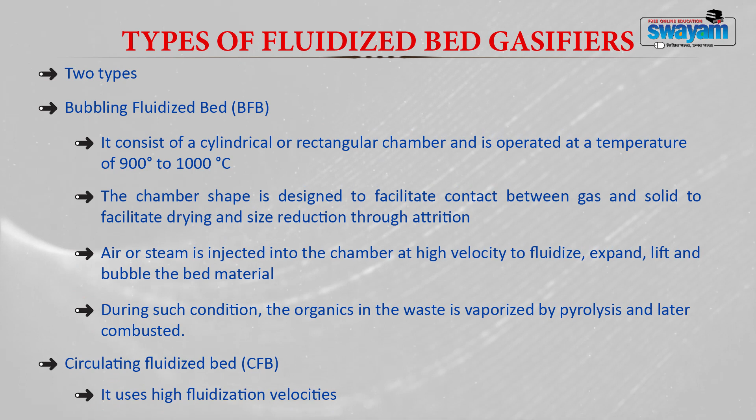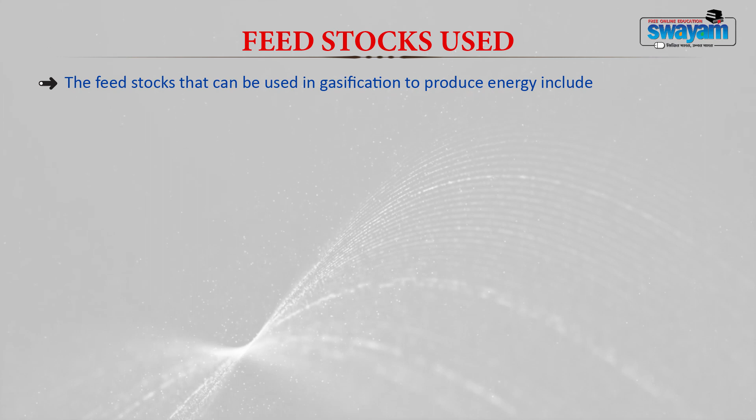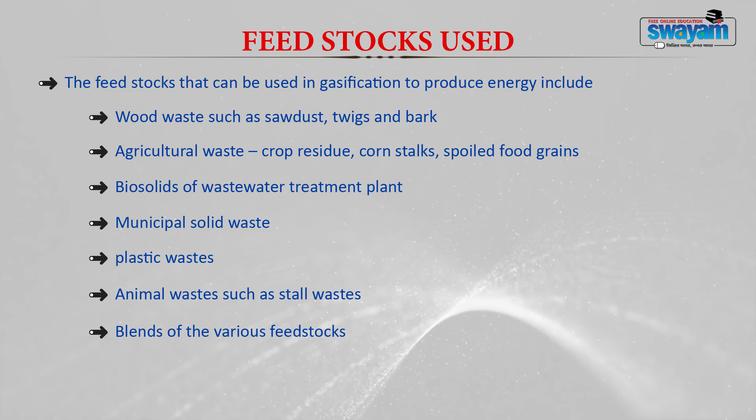Now, let us look into the various feedstocks that are used for the gasification process. Feedstocks should be chosen in such a way that they can produce energy, like wood waste such as sawdust, twigs and bark. Agricultural waste like crop residue, corn stalks, spoiled food grains can be used in gasification process. Biosolids that are produced from the wastewater treatment plant can be used. Municipal solid waste and plastic waste can also be used in a gasifier. Animal waste such as stall waste, blends of various feedstocks, inorganic waste or recyclables such as glass and metals cannot be burnt by the gasification process.

Now, the feedstock generally requires pre-processing or screening to remove the recyclables and inorganic materials, and then it can be fed into the gasifier unit. Shredding of feedstock can improve the efficiency of treatment of municipal solid waste, and the moisture removal also improves the efficiency of gasifier. Thus, the waste or the feedstock should be generally dried and shredded before being introduced into the gasifiers. Now, let us look into the various benefits of the gasification process.

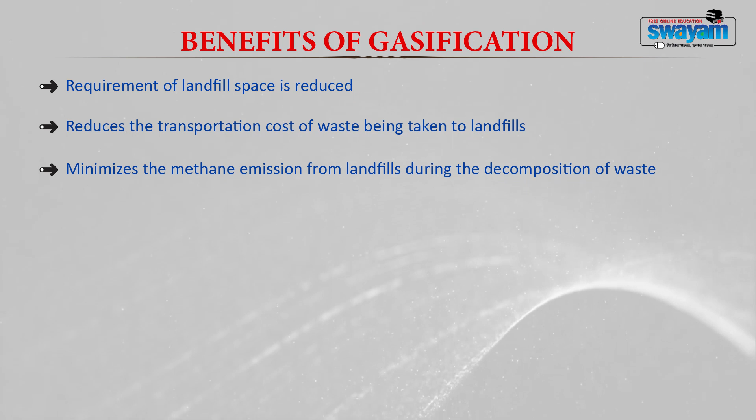Just like other thermal treatment processes, gasification reduces the requirement of landfill space. It reduces the transportation cost and it minimizes the methane emissions from landfills during decomposition of waste. It reduces the risk of contamination of water bodies. The syngas that is produced becomes a useful energy product, and the end products that are produced have a high commercial value, fertilizers and chemicals. They also enhance the existing recycling program. They also reduce the use of fossil fuels. Tar, a valuable product, is produced from the gasification process. The volume of waste is again reduced. Plastics that cannot be recycled can be burnt in a gasification process.

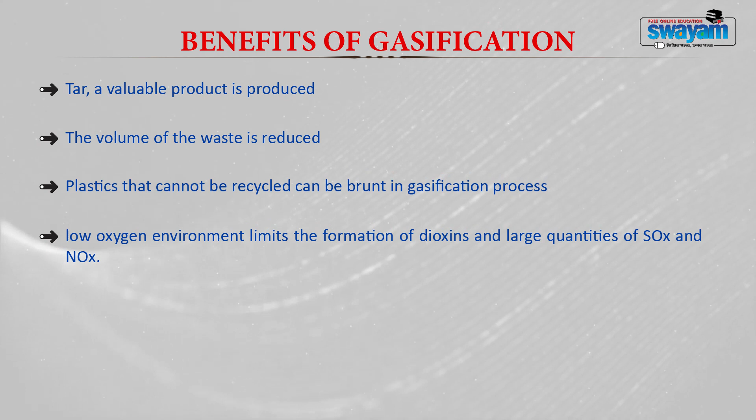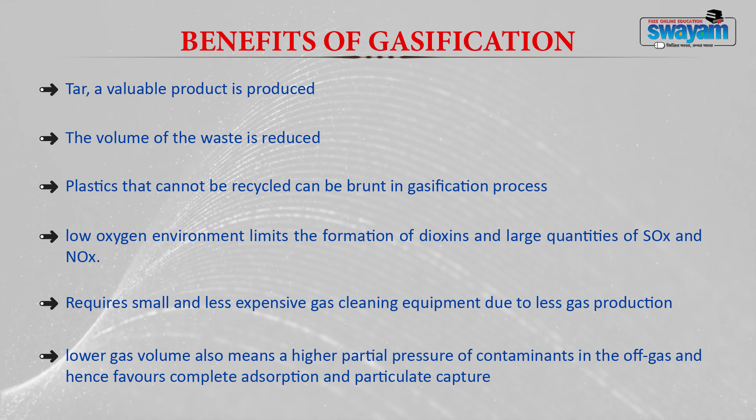Moreover, the low oxygen environment within the gasification unit limits the formation of dioxins and large quantities of SOx and NOx formation. Also, they require small and less expensive gas cleaning equipment due to less gas production. Lower gas volume also means a high partial pressure of contaminants in the off gas, and hence they favor complete adsorption and particulate capture.

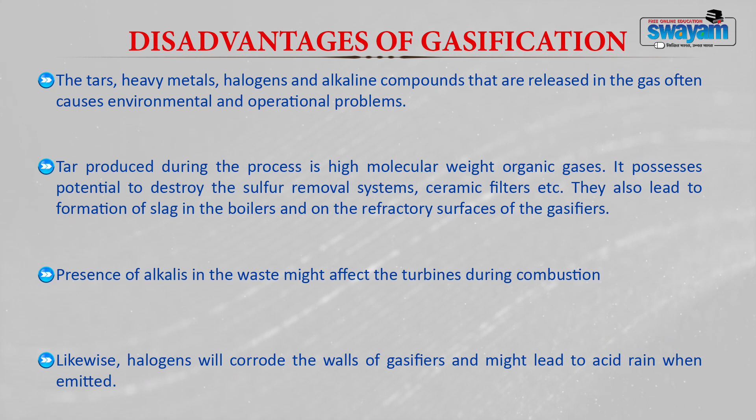Now, the disadvantages of gasification process: tar, heavy metals, halogens and alkaline compounds are released in the gas and often cause environmental and operational problems. Tar produced during the process is a high molecular weight organic gas. It possesses a potential to destroy the sulfur removal systems and ceramic filters, and also leads to the formation of slag in the boilers and on the refractory surfaces of the gasifier. Now, the presence of alkali in the waste will affect your turbines during combustion. Likewise, the halogens will corrode the walls of the gasifying unit.

At the end of this module, we have studied what an advanced thermal treatment process is. We have discussed the concept of pyrolysis and gasification. We have also understood the process description and the mechanism involved in pyrolysis and gasification process for waste breakdown. We also saw the characteristics and the significant applications of the various products that are produced during pyrolysis and gasification process. Then we discussed the different types of pyrolysis and gasification process, and we also studied the different reactors that are used in pyrolysis and gasification process. Lastly, we discussed the various merits and demerits associated with the pyrolysis and the gasification process.